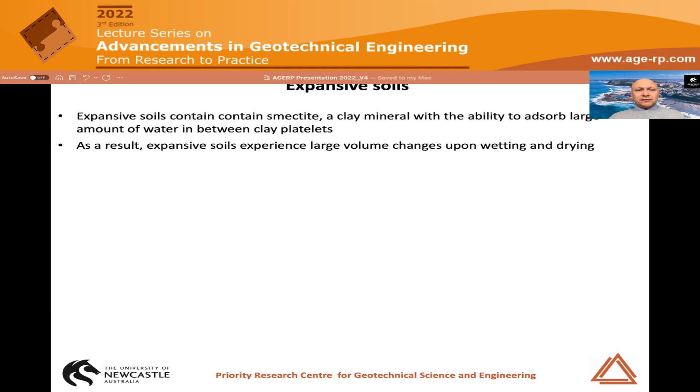So the talk is about expansive soil, and those soils are basically characterized by the fact that they contain smectite, and smectite is known to be a swelling mineral. So it has the ability to adsorb a lot of water in between the clay platelets, and that for two reasons: the platelet surfaces are negatively charged, so they attract the positively charged water dipoles, and there is a weak bonding between the platelets that actually allows the platelets to be pushed apart and take up the moisture, the water. And as a result of this phenomenon, those sorts of soils experience large volume changes if you wet them or dry them.

And as you can imagine, that can pose some problems for structures that are built on expansive soil or using expansive soils. You've got such an example here on this photo - this is a building in Newcastle that has been vacated and cannot be used anymore. It's got very serious structural damage, which is caused by those movements, and in particular differential movements of the expansive soils it's built on.

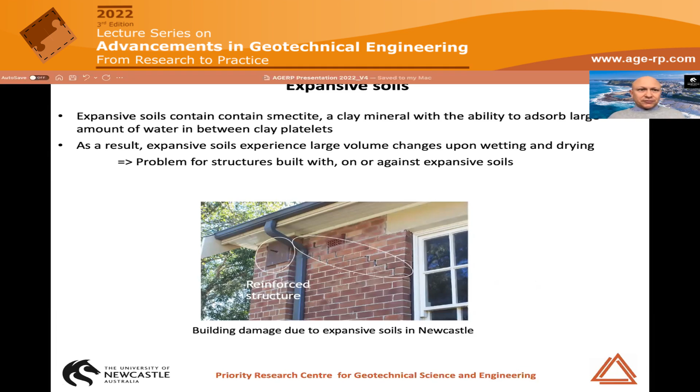Now, one of the issues we're dealing with is that those soils are fairly common in Australia. You've got a map here that was produced in 1983 by Richards, and it shows in black the extent of expansive soil. One of the problems is that those areas actually coincide a fair bit with areas where we have a lot of urban developments, infrastructure developments. So basically that poses a geotechnical problem for engineers.

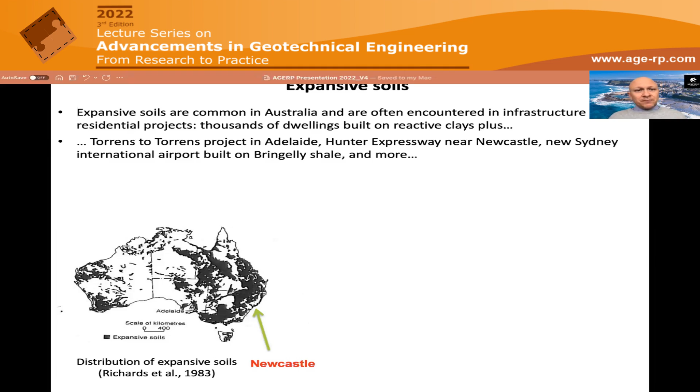So we've got thousands of dwellings built on reactive soils, but not only that, it's not only a matter of simple residential houses. We've got big projects as well involving expansive soil. So you've got, for example, here a photo of the Torrens to Torrens project in Adelaide - a major infrastructure work, and there are some expansive soils involved in here.

You've got now a photo of the cutting of the Hunter Expressway, which is a highway near Newcastle. And that cutting shows you interbedded layers of weathered claystone, expansive, and coal material. And for financial and environmental reasons, those materials were actually incorporated in the earthworks of the freeway, so posing challenges.

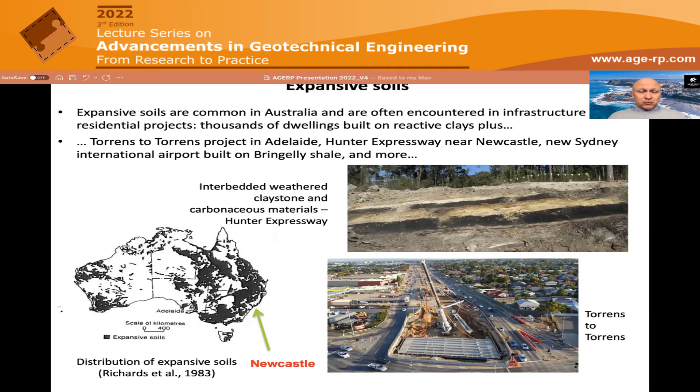One of the latest developments here in New South Wales, the new Sydney International Airport, is built on a profile that has a lot of Bringelly shale, which is known to contain expansive minerals as well. So it's a real engineering problem to deal with those expansive soils.

As such, it's quite important to be able to characterize the volume change upon wetting and drying of those soils. There's volume change upon mechanical action, and there's volume change due to wetting and drying. Here I'll be focusing on the wetting and drying side of it, in particular the shrinkage curve and the swelling response.

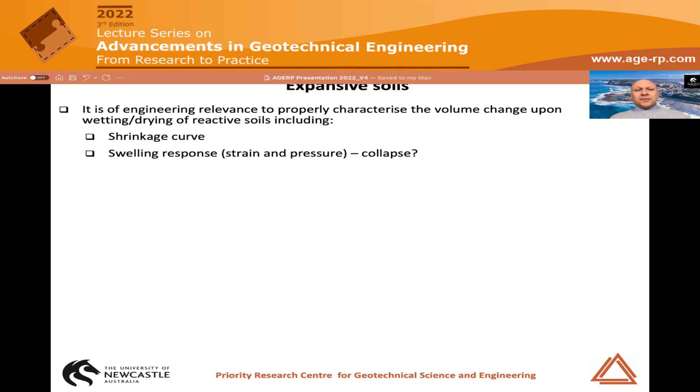And the swelling response is in strain and pressure. And we'll see it may involve some collapse, which I'll define and explain.

Now, just a quick note, you've had talks about desiccation cracking. I just want to say it is out of the scope of this presentation. It is relevant for engineering practice, but out of scope at the time being.

The idea here for me was not to give an extensive lecture on the topic, but just use this as an opportunity to share some of our findings on those matters, and try to actually look at the microstructural aspect of it to explain and interpret some of our results.

The reason for that is because we know from the 50s that there's a very strong influence of soil structure on soil behavior. It's been recognized fairly early for compaction tests, for example. That's one classical example, but you'll find other examples of that.

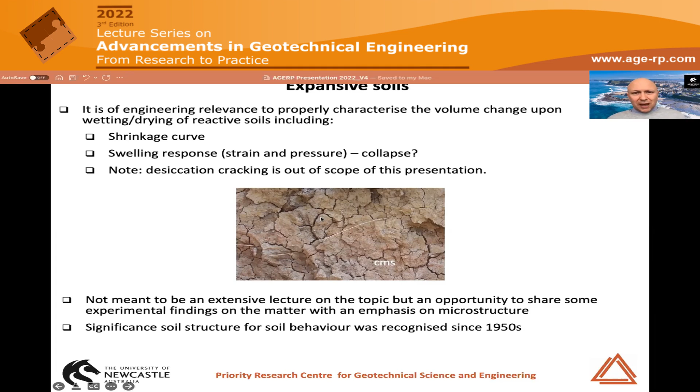Here we talk specifically about microstructure because we're looking at what's happening at a level that we can't see with the naked eye. So we're not talking about those sort of cracks. We're trying to understand what's happening inside the soil at a level that we can't see.

So how do we actually characterize the microstructure? If you go back to the early literature, what you find is that description of microstructure is typically qualitative. You've got those drawings of rectangles showing the platelets or arrangements of assemblies of platelets with edge-to-edge, edge-to-face, face-to-face contacts. Sometimes you've got scanning electron microscope, or SEM for short, images supporting the analysis.

Now these days, you've got a range of quantitative options. If you're interested in characterizing the microstructure in a quantitative manner, you've got nitrogen adsorption, MIP which is mercury intrusion porosimetry, tomography, and others. We've used for all our research the MIP technique, mercury intrusion porosimetry.

It gives you a quantitative analysis, but you've got to be careful. It's not what I call the magic bullet. It relies on assumptions, it's got limitations, so you need to be aware of those when you use such a technique. We typically combine SEM analysis and MIP to get a more comprehensive assessment.

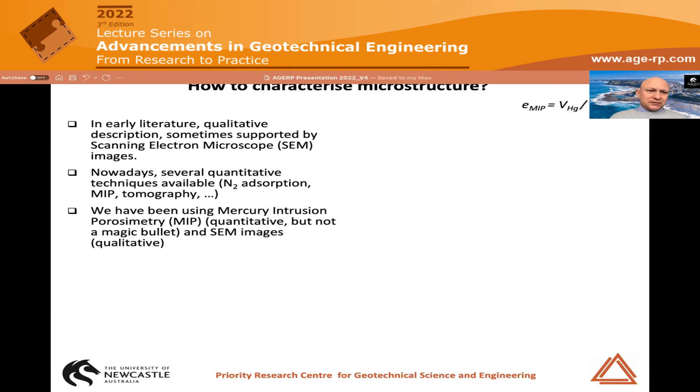What this is defined as is basically we're looking at the volume of mercury that has been intruded in a specimen over the volume of the solids. So the specimen has no water, in the mercury it's only solid particles, so that's the VS. And this is a function of entrance pore diameter.

So that's the thing you want when you characterize microstructure, you want to know about pore size. The intrusion curve starts with a large diameter, easier to intrude, and we push the mercury in and progressively it intrudes the smaller pores.

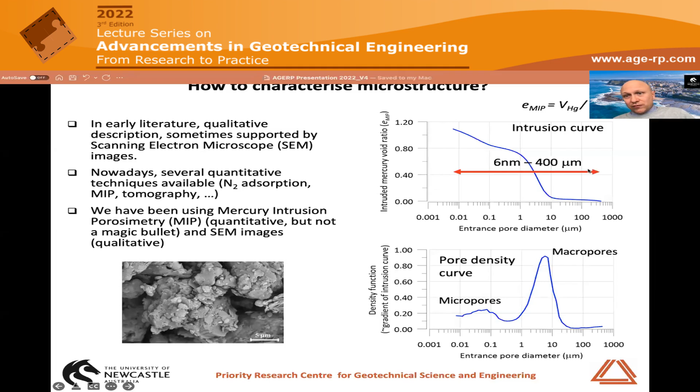So fairly wide range. Now, what happens is that soil structure changes when you load the soil hydromechanically, so external stress or hydric stress, and it's even more pronounced for expansive soil. I wanted to show you the results of Maryland clay, which is our favorite candidate soil here in Newcastle. It contains about 10% of interlayered illite and smectite, and it's got a plasticity index of 46%.

Starting by the figure in the middle, so these are all pore size density functions, showing the peaks of pore families, with pore diameter on the horizontal axis. Starting with the one in the middle, what you see is that we've conducted an MIP analysis post-compaction. As you reduce the void ratio of the specimen, so the more you compact it, the more the macropore family reduces. So the micropores are unaffected, but the macropores reduce in density and in size.

Now, if you take such a compacted soil and you allow it to swell freely without surcharge, the pore size distribution may go from the continuous black line to the blue line. And if you did MIPs along the way, if you stopped the test and did MIPs, which we did, what you see is that you tend to have the two pore families sort of merging. So that big pore family in the middle is partly the result of the merging of the two families of pores, with a reminiscence of micropores on the left.

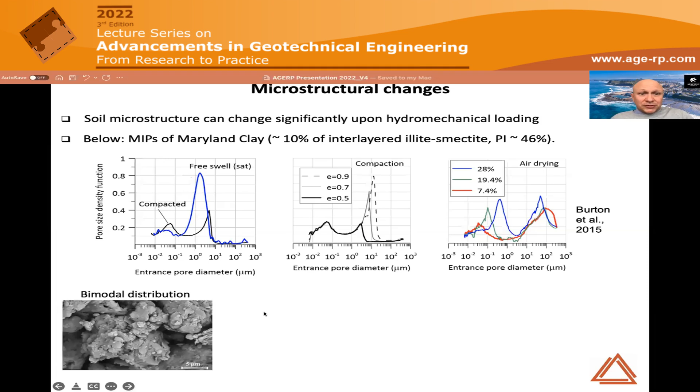And basically, if you take an SEM photo, what you find is you go from a clearly aggregated structure to something like a matrix-like structure, where you can't really see macropores and micropores anymore, which is consistent with this sort of distribution. Now, if you look at air drying, starting from the blue line, you find that this time the drying affects both micropores and macropores significantly. So the micropores tend to reduce, that's your aggregate shrinking, and the macropores can reduce or increase because you may have opening of porosity in the process. It's quite a complex phenomenon, that one.

So if we consider the fact that microstructure affects soil behavior, and if you see that microstructure changes so much during the hydromechanical loading processes, it makes sense to try to follow what's happening with the structure, and in particular try to quantify it. So one thing is to show it and have something qualitative, but the question is, okay, how do we process those curves here to get some quantitative information that we can use?

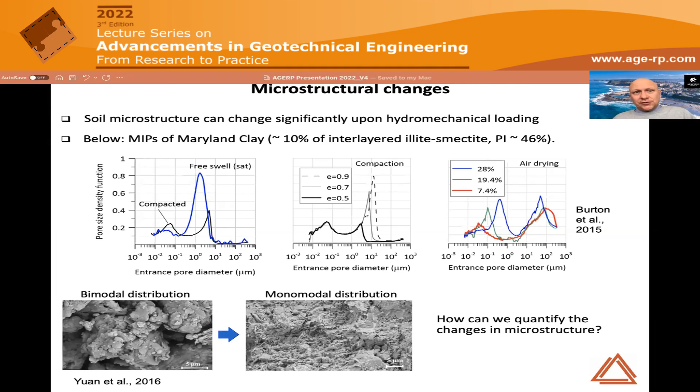And the way we do this is to define a void ratio for the micropores, so that's E lowercase m, and a void ratio for the macropores, E uppercase M. And how do we define those from those curves here, those results? We typically use the intrusion curve here. It's got void ratio on the vertical axis. So we use this to define those two void ratios here.

But what we need is a boundary. We need a boundary that says, okay, all pores larger than that value are macropores, and all the other pores are micropores. So we need to set a boundary here. Once you've set the boundary, you can basically look at how much mercury has been intruded for the larger pores and say, well, all that mercury goes into the macropores, and you can read off the axis the E macro, and the rest is basically E micro. So the rest being the void ratio of your specimen as you've prepared it, or as it stands, minus the void ratio of the macropores.

Now, these whole results here, those values you're going to compute depend heavily on this boundary you select. And there are many criteria in the literature to select a boundary. There's no good or bad criteria - they're different criteria based on physics or logic. And the thing is, you've got to be a bit careful.

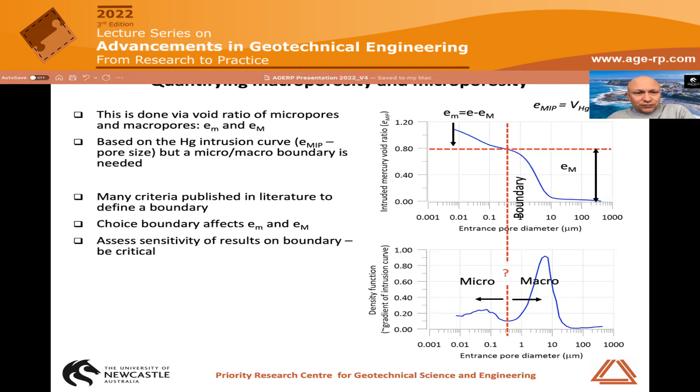You've got to assess the sensitivity of your results to the choice of your boundary here, because it may affect those two values of void ratio a fair bit, so you've got to be a bit critical about it. If you want to know more about this, there's a publication by a PhD student, Yuan et al. 2020. I'll give you a list of publications at the end where we've discussed those different boundaries and what the implications are when you pick one or another.

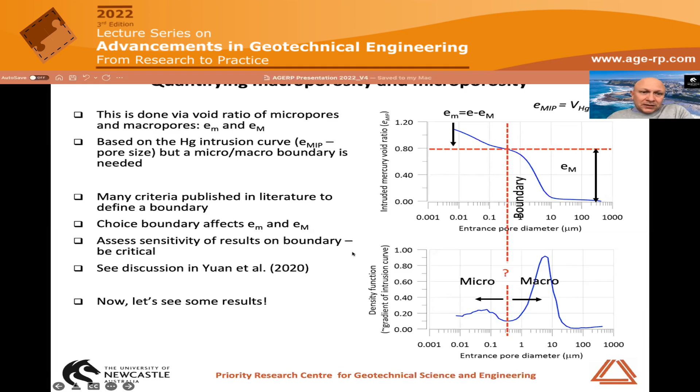All right, so with this presented, let's delve into some of the results here. The first thing I wanted to talk about is the shrinkage curve. The shrinkage curve is the evolution of the void ratio of a soil as it dries, and we correlate the void ratio with the amount of water. That can be in terms of gravimetric moisture content, W, volumetric, theta, or even the water ratio, EW. So you've got here a typical shrinkage curve where the void ratio follows the 1-to-1 line, meaning we've got saturation, and the gradient of the line is the GS of the soil.

You've got an SEM photo of the soil here. That's a remolded specimen, so the SEM is taken at a void ratio of 1. The soil shrinks but doesn't desaturate, follows the 1-to-1 line, and eventually after a while they pass from the line and you get into the residual stage where you've got the shrinkage limit.

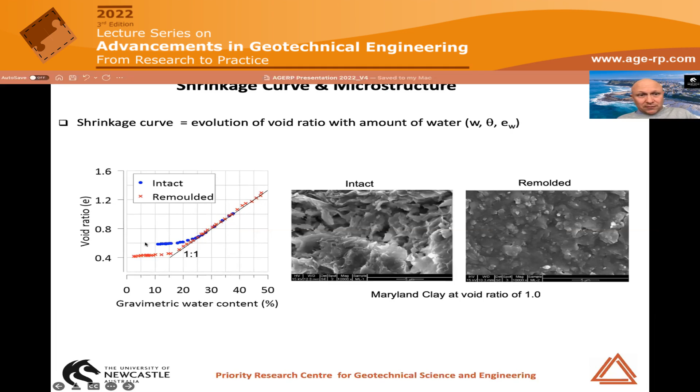So that's well known. Now what's interesting is that if you now test an intact bed of Maryland clay, you've got a different result. Similar sort of trend - the soil first shrinks along the 1-to-1 line, but desaturates much quicker. The value of final void ratio here and the value of shrinkage limit aren't quite the same. And what that shows is that you've got a strong influence here of soil structure. We've got larger pores in the intact soil, which basically means we'll have a quicker desaturation. So the blue dots depart from the 1-to-1 line much quicker, and the volume change is not as pronounced as the one of the remolded soil here.

So this is an effect of structure. And when it comes to geotech engineering projects, depending on what structure the soil will have in your project, you may need to test the soil intact, remolded, or compacted.

So for example, we've got projects where we dig the soil out and recompact it in an embankment. Other projects, say for example, you've got a soldier pile wall where you install the piles in an existing profile of soil and you don't dig or backfill, the soil at the back of the wall will be in its intact or close to intact condition.

So you need to be mindful here when we try to characterize the volume change, to try to do that on a soil that has got a structure as close as possible to what we're going to have for a project.

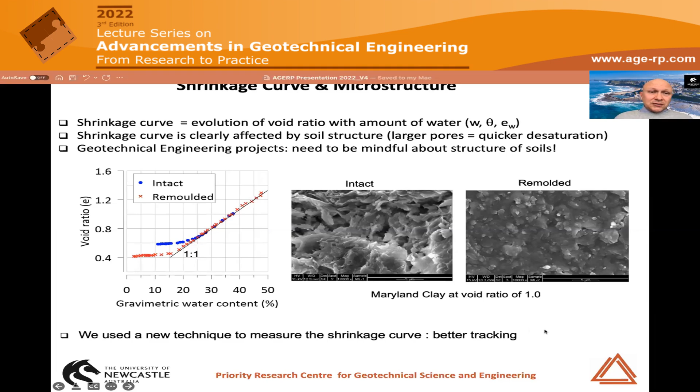Now, I don't know how many of you have tried to or have measured shrinkage curves on a regular basis, but here we've managed to get a lot of points and a very nice tracking of the volume change. We did that using a technique that we've developed because we got a bit frustrated with some of the techniques that were typically used. I'd like to present that to you because it may be quite useful.

In particular, the typical way to do it, or probably the most logical way, would be to have a specimen of known shape, clearly defined shape, typically a disc, and you measure the dimensions of the specimen. As it dries, you keep measuring the dimensions, you know the volume, you know the mass, you can plot the shrinkage curve. The issue comes where you've got irregular shapes, or if you've got warping or distortion upon drying.

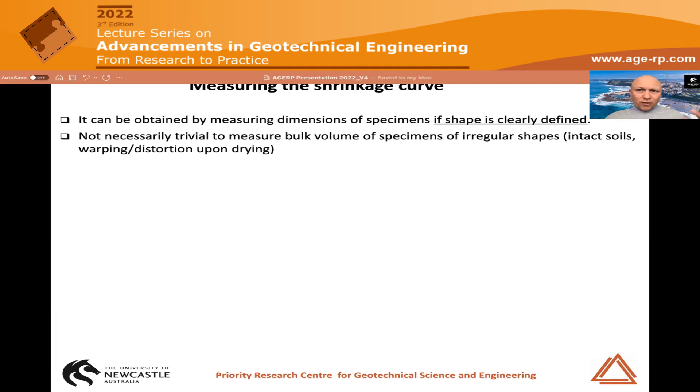The one that is really good because it's non-wetting is mercury. But the issue with mercury is safety - plenty of safety issues around mercury, so it's quite difficult to work with mercury in an open container these days.

Water is a fluid, but it's adsorbed by the specimen, so it doesn't quite work. You can use oil, but oil isn't absorbed by the clay, though it contaminates your specimen. So if you've got cracks or big pores, it gets into there, and you end up having inaccurate readings.

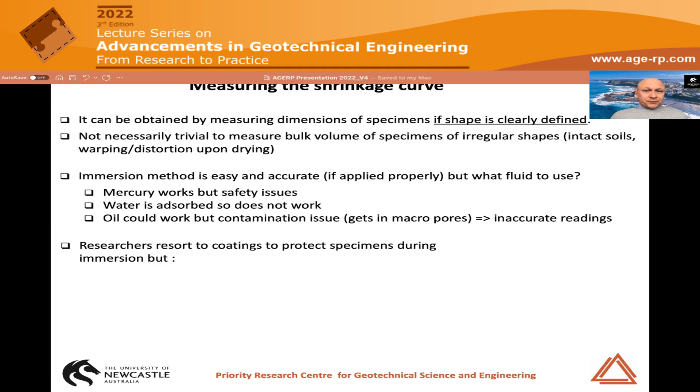So what people did or suggest is to basically coat the specimen. One known technique is to use paraffin. You've got a photo here, which I found from the web, of a paraffin-coated specimen. The issue with this is that if you want to do a whole shrinkage curve, you need plenty of specimens in parallel, or you have to coat, remove the coating, new coating, remove the coating, and so on, with all the accumulated error that you get on your measurement.

There's also another technique called the plastic bag technique, where you put a specimen in a plastic bag, vacuum it, and then immerse the plastic bag in the liquid. That has got other issues as well. I mean, vacuum is a stress - you're putting some stress on the specimen. You've got the vacuum bag, which is linked to a tube as you immerse it. And there's a lot of handling and smearing of specimen.

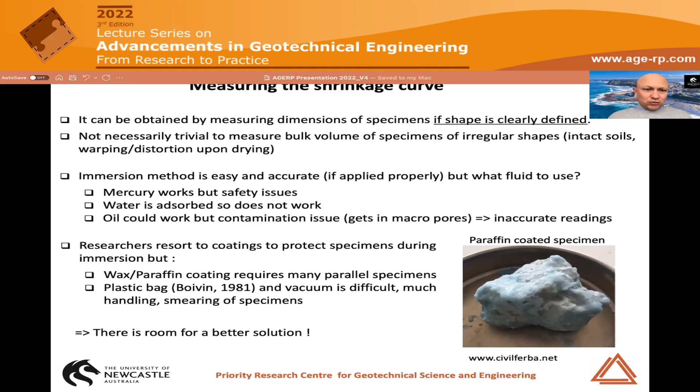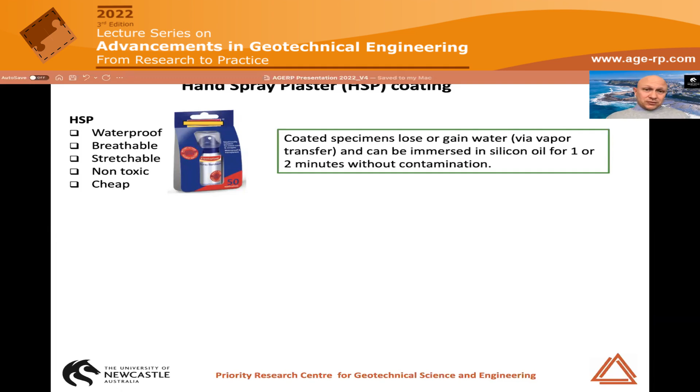What that does is that if you coat the specimen with this, you can have moisture exchange, gaining or losing water by vapor transfer, but you can then take the specimen, immerse it in oil or water for a short period, and the spray plaster will act as a barrier, so your specimen doesn't get contaminated.

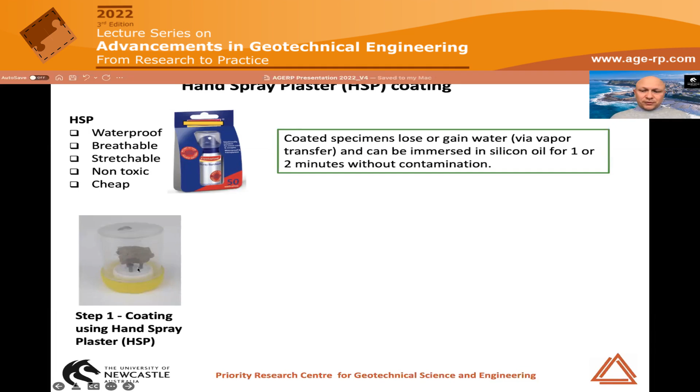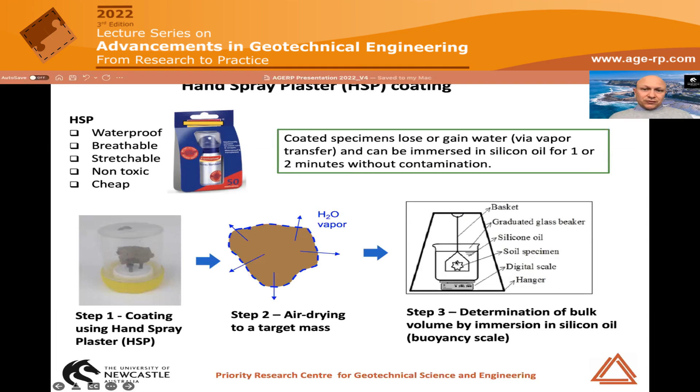So what you do is take the specimen, put it on three prongs here, spray the top part of it, cover it so that it doesn't dry too much. After a while, turn the specimen upside down, repeat the operation so it's entirely sprayed. Then you can expose it to drying if you're after the shrinkage curve, or humidity in a fog room if you want a swelling curve. And then basically use the buoyancy technique, immersion, to get the volume of that specimen. That works for any irregular shape.

And the benefit of this is that it's also fairly useful if you want to measure retention curves. If you want a retention curve expressed in saturation degree, you need volume - a relationship between volume and moisture content, or volume and saturation and suction. That technique allows you to get really nice tracking and accurate data here.

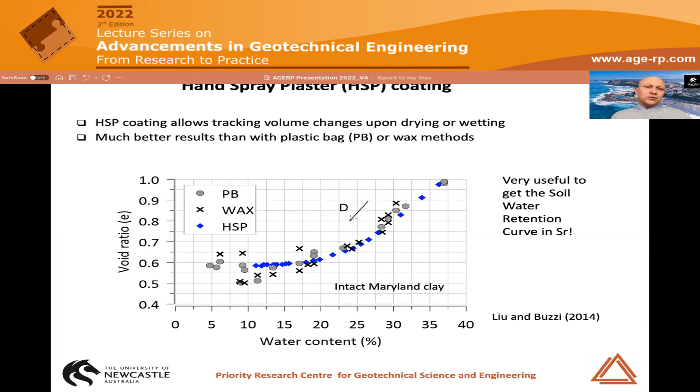So it's pretty useful. Now, let's move on to the swelling response here. And just as a preamble, I want to say that all I'm going to present here is only in 1D. Now, 3D swelling in all directions is relevant for engineering practice, but it's more complicated. So I thought, let's start with 1D information and see how we can move from there.

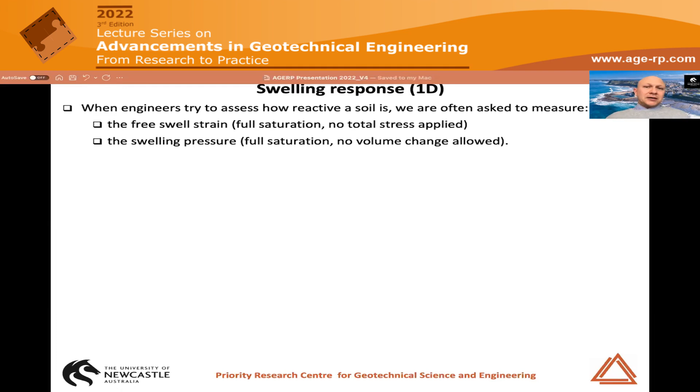Our experience here in Newcastle is that when we have to deal with reactive soils, there's a range of parameters that engineers like to measure: Atterberg limits, linear shrinkage, and so on. And when it comes to the swelling response as such, they're often interested only in the free swell strain. That's taking the specimen in an oedometer test, letting it swell in 1D under full saturation without total stress applied to the specimen - so the maximum swelling strain you're going to get. And the swelling pressure - again, full saturation, swelling to full saturation, no volume change allowed, and get those two numbers. From that, you assess how reactive the material is.

So you can actually, on a stress strain plane, plot those two results. You've got here swelling pressure on the left axis - that's the maximum stress when you've got zero strain allowed. And the free swell strain is here at the maximum strain under no stress applied.

So before we keep going, I'd just like to clarify the conventions here for my presentation. I will be talking about strain rather than void ratio.

It's a bit against geomechanics conventions, simply because when you compare the amount of swelling for two soils at different void ratios, the void ratio can be tricky to interpret. Whereas if you look in terms of strain, you get a clear idea of the magnitude of swelling you're observing. I'll consider positive strains or positive displacement as corresponding to swelling, since the focus is on swelling, otherwise I'd have this negative sign all along.

The stress on the y-axis here is a total stress, because the way we measure swelling pressure is with a load cell external to the specimen, so technically we measure total stress. And when you put a load on a specimen, it's a total stress you apply to it. So at this stage, consider stress here as total stress - it can be either the swelling pressure measured or a total stress applied to a specimen.

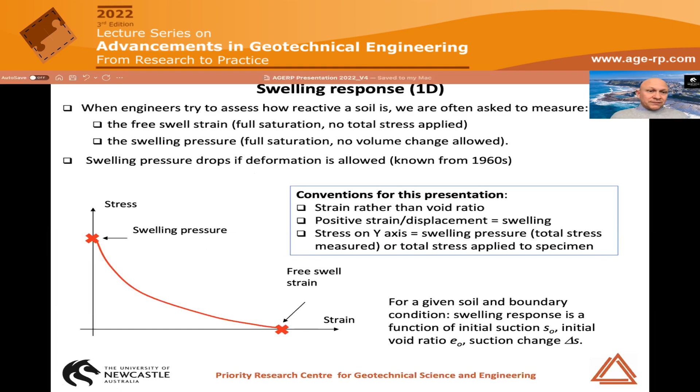What we know as well is that for a given soil and boundary condition, the swelling response is a function of the initial suction, the initial void ratio, and the suction change - in other words, the magnitude of hydration. So in fact you don't have one curve, you've got many curves, and that curve shifts upward as the amount of hydration goes up, the initial suction goes up, or the initial void ratio goes down. So the denser and drier your specimen, the more swelling you're going to get.

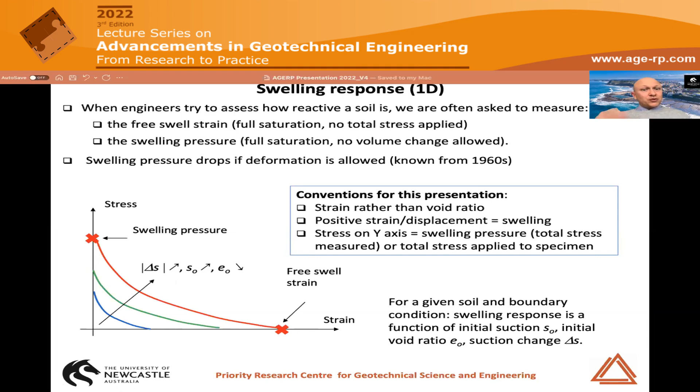Now, how is this relevant? Well, in the lab we tend to often test to full saturation because that's quite practical. But in the field, you've got to ask yourself, to what extent will a soil undergo full saturation? Or do we have partial swelling, partial hydration of the soil under a given environmental condition? So again, full saturation swelling would possibly be the worst case scenario, but is it the most common case? Maybe not.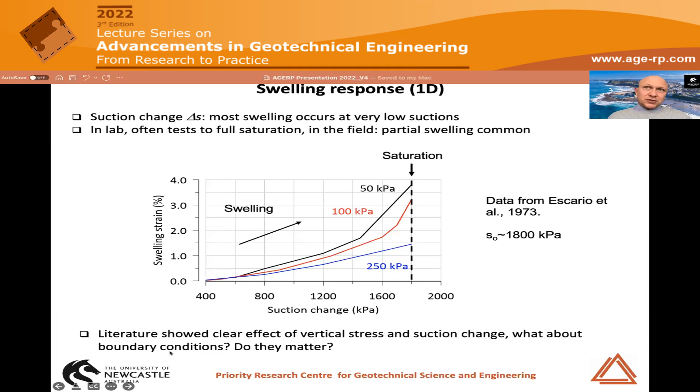So from the literature, we know clearly the effect of vertical stress on swelling, or confinement, and we know the effect of suction change. One thing we don't quite know is the effect of the boundary conditions. We've been talking about free swell and constant volume, so we know what these two do - but what happens in between? Does it matter?

So what we looked at is establishing this swelling response in the first place - how the combination of swelling strain and swelling pressure evolve as you allow for more and more swelling strain. We did that on compacted Maryland clay using a constant volume test that gives you the swelling pressure in point B, a free swell test that gives you the free swell in point A, and a range of swells under constant stiffness - those are basically soil swelling under a spring, so you've got a linear relationship between stress and strain.

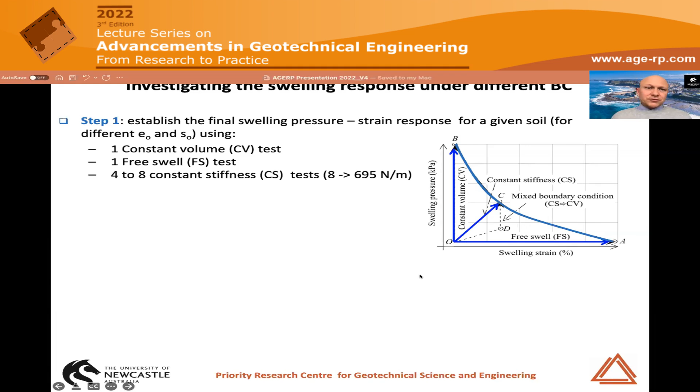Those tests are shown here by the blue arrows. And then what we did is conduct other tests using different stress-volume paths, and see where the final stress and strain falls - whether it's close to this swelling line or not.

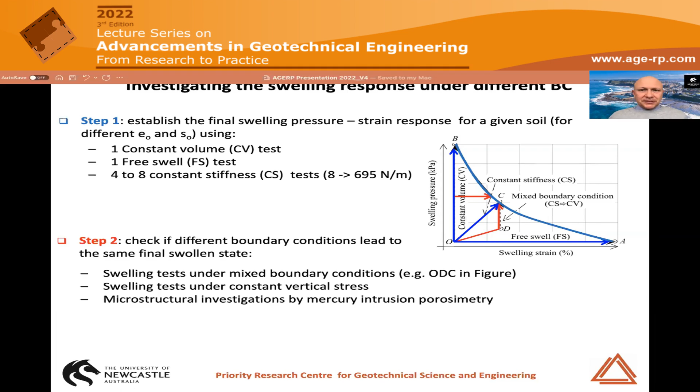So to do that, we did a series of tests under constant vertical stress, that's the horizontal red arrow, and what we call mixed boundary conditions. So swelling at a certain stiffness, then block the volume, and let the swelling pressure develop. See what happens. And at the end of all those tests, we conduct some microstructural measurements using the MIP technique and see what happens inside the specimen.

The first series of tests we did was with the Hunter Expressway claystone, the one I showed you a photo of earlier, and it contains 27% montmorillonite, which is a sort of smectite. We consider 2 initial water contents and 2 initial void ratios, so that's 4 combinations of starting conditions.

In stress versus strain planes, you've got the different responses established using the specific tests. What you see is, first, the denser the specimen, the more swelling we get. That's how the empty diamonds sit above the full circles for both cases. So that's consistent with what we know, and that's good.

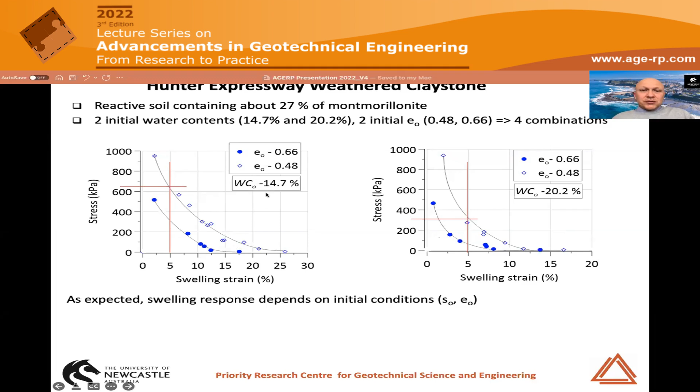Now, if you look at the effect of moisture content, you'll find that for a given void ratio, say 0.48, the wetter the specimen, the less swelling you get. For example, if you look at a swelling strain of 5%, you'll find more swelling pressure developing in the drier specimen. So that's reassuring, first of all, that you establish those curves and they follow basically what you would expect.

Now, the question is, what do we get if you superimpose the results of the mixed boundary conditions and other tests? Well, that's what you've got in black here. And what you see is that regardless of the path, you basically end up fairly close to all the other points, or in between where you would expect that line. So at the macroscopic scale, we end up with an expression of swelling in terms of strain and stress or swelling pressure, fairly similar to what you'd find along the line, the swelling response established with the prior test.

Now, what happens in terms of microstructure? If we take those 2 black dots, the diamond and the inverted triangle, and compare the microstructure, these are the black lines here, the continuous black and the dashed black. Just to give you an idea of the variability of structure, the purple line is as-compacted, the green line is free swell, and the dashed line is swelling under constant volume. So you see there's a fair bit of change in microstructure between the two.

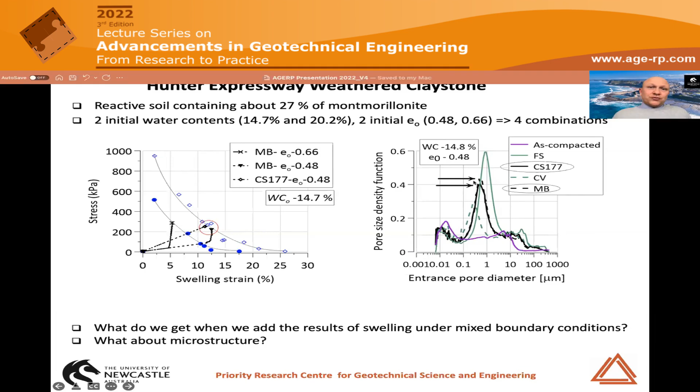What we found is the microstructure of those 2 materials, having swelled along different paths, are fairly similar. So that corroborates the observation at the macro scale.

Now, we did a series on Maryland clay as well, and these are only partial results — there are more results in a paper we published last year. Again, we basically observed the same thing. We've got a swelling response established with a blue cross, then a series of other tests, constant vertical stress, the red lines, and mixed boundary conditions. You find again that the tests, regardless of the path, basically end up very close to the swelling line.

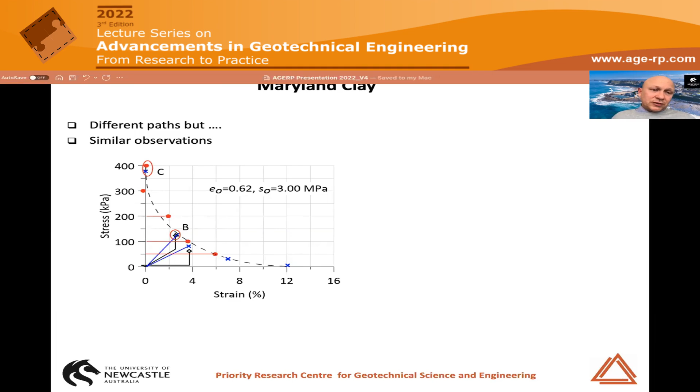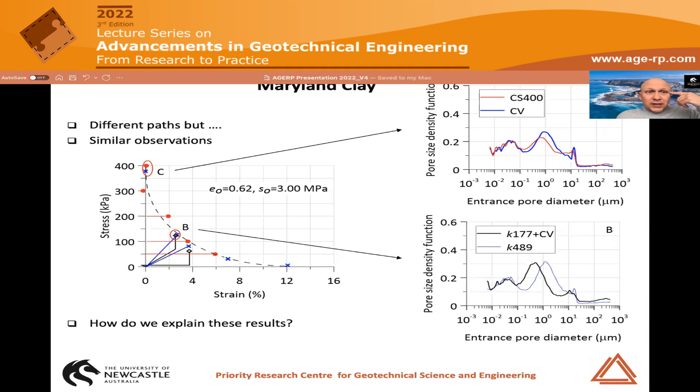Now, why is that? How do we explain this? To explain that, we had to go back to some microstructural analysis, and what I'm giving you here is our interpretation of this. If somebody has a different idea, I'd be glad to hear it. But what we did here was conduct another series of tests, swelling under constant vertical stress with increasing value of stress, and at the end of it, again, microstructural measurements.

Our interpretation of that, in the context of the previous test, is that basically what matters when it comes to the swelling response and the path followed to get to full swelling is the magnitude of the maximum applied stress, rather than the path itself. So as long as you end up with the same maximum stress, the strain and microstructure you get will be similar.

If there's more swelling and then coming back, so if you overtake the swelling line and come back, it might be a different story, as some of the test results on swelling pressure in the literature tend to suggest.

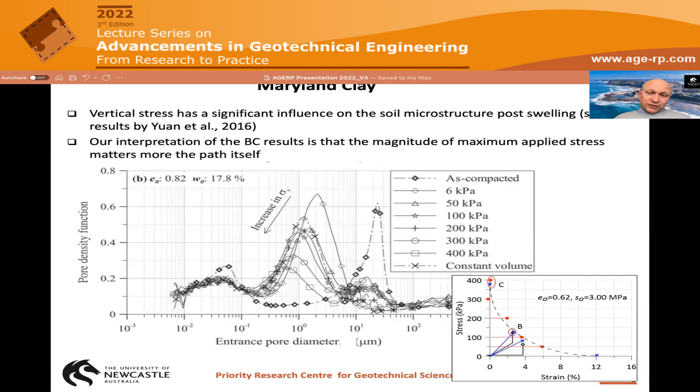So the soil will be compressed, and we'll have compression instead of swelling here. And that leads me to the concept of wetting-induced collapse. That's something that's been known since the 60s - it's a reduction of soil volume or swelling pressure upon wetting under load. So you take an unsaturated specimen, put a load onto it, wet it, and you get either swelling, an increase in swelling pressure, and then reduction.

That's when you do a test at constant volume. Or if you do a test at constant stress, like the blue line, where you've got the displacement measured on the right axis, going down as specimen height reduces. What you've got here, at point A - this is all 1D, an oedometer - you apply the load, so the specimen is compressed to B.

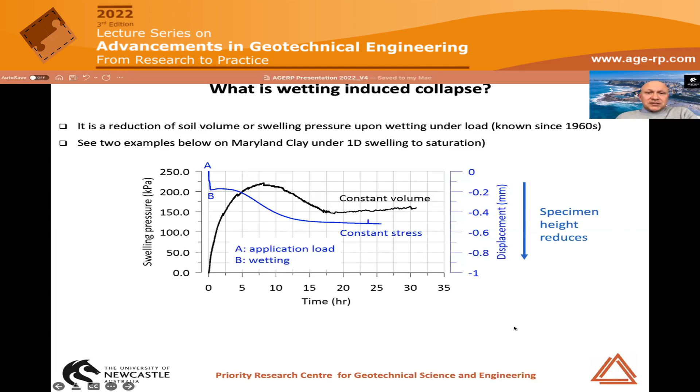Then at B you wet the specimen, and you have initially some swelling, and then basically you get a collapse - specimen height reduces. Now this is how we express collapse here.

Now how is this relevant to practice? Well, you've got some soils that are naturally collapsible, and loess is one. There's plenty of loess in China, and you've got a photo here of areas where the soil has collapsed. You can imagine if you're building on a soil profile like this, it may be challenging.

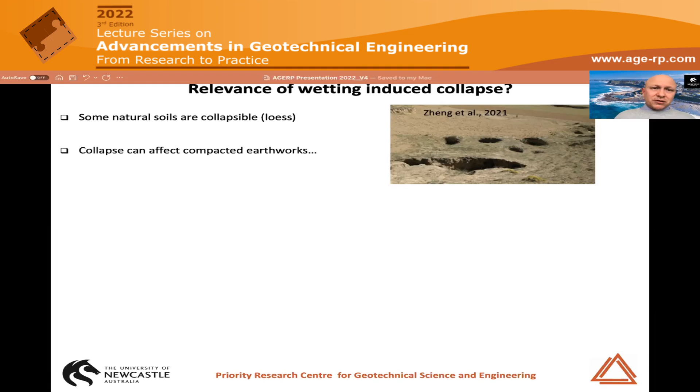It also affects earthworks. There tends to be a belief that if you've got compacted earthworks, collapse is not a problem. It's not a problem if it's done well, but it's not always the case. You've got here a photo, for example, of a bridge abutment where the embankment has collapsed after heavy rainfalls, and that brown mark basically shows the magnitude of collapse of that soil, so fairly significant.

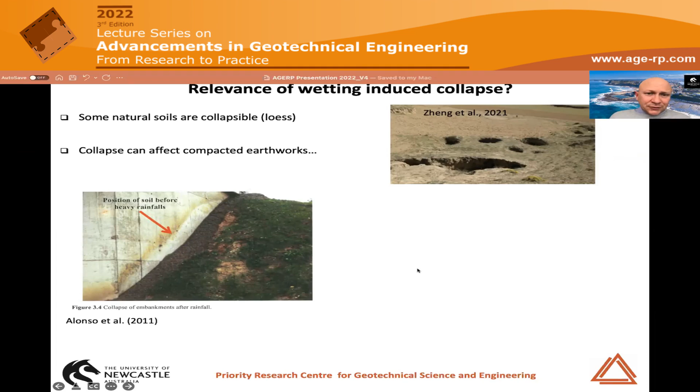In Australia we've got a different challenge with collapse. What you see here is a waste rock dump coming from open pit mining - it's a consequence of mining that we create these mountains of dirt. And those are placed without much compaction; it's basically compacted by self-weight. There's not a lot of compaction activity happening when this material is placed here, and these are hills of hundreds of meters in height.

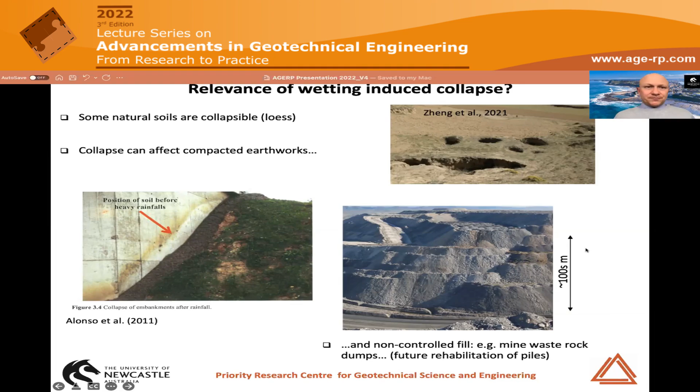And at the end of the mining operation, when the mine reaches its end of life, this is all capped and turned into vegetated ground. Now what happens is, because there are kilometer squares and kilometer squares of it, the question arises as to what extent this ground is suitable for development. You can imagine if you've got something that hasn't been quite compacted, and it's not saturated, and we wet it, and there's a lot of load on it because it's really high, there could be a lot of collapse happening. So that's an area in the mining geotechnique space where collapse is very relevant.

Now, how do we actually capture collapse, or explain collapse? There are different models to do that.

I'll present some results using the typical two-stress approach, with suction and net stress. For the test we conducted in the lab, we start with a loose packing of clay particles at a certain moisture content, at point A. Then we compact them to a certain level, point B, offload them, and bring them back to a certain stress, point C, to do a test.

At point C we wet the specimen, a swelling test under constant vertical stress. In the suction net stress plane, you've got what we call the LC curve, the loading collapse curve, which is the yield point that tells us if we're going to have collapse or not. If the stress path crosses that line, you've got collapse according to the model.

The way to look at those curves is that for a given void ratio, the LC curve is the locus of compaction stress and suction points. So at a certain point, it tells us how much stress was needed to get to that void ratio, or the maximum stress applied, and what is the corresponding suction.

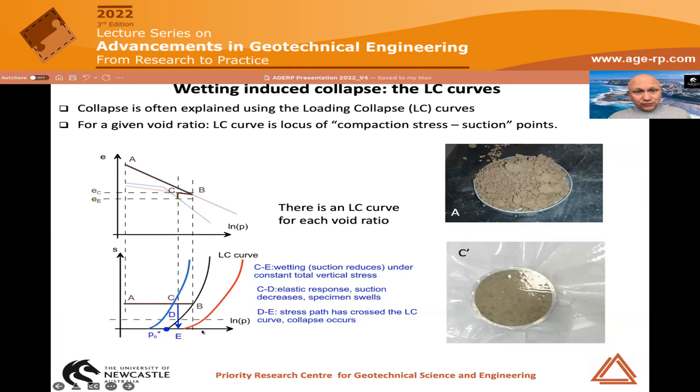Before moving on to more results, I wanted to explain how we can measure the LC curve from compaction. If you do a series of quasi-static compactions, not the dynamic ones, to a target void ratio, you can measure the total stress you apply to the soil and the suction. If you've got the combination of void ratio, total stress, and suction, you can plot the LC curve. You repeat that for a range of suction values to build the whole curve.

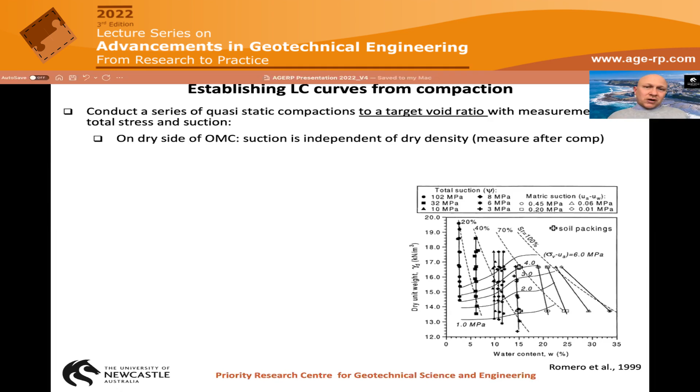So how does that matter for our problem? If you're on the dry side of the optimum, suction can be measured before or after compaction, no problem, since it's independent of dry density. But if you're close to optimum or on the wet side, you need to measure suction during compaction, for example using a tensiometer.

For Maryland clay, here's the evolution of measured matric suction with vertical stress during compaction. The optimum moisture content is 24%. At 13%, on the dry side, there's no change. As you approach the optimum, you start to see some influence, related to the concept of mechanical wetting. If you exceed the optimum, you get a very large change of suction during compaction. So when associating a value of suction with a value of stress to build the LC curve, you need to be mindful of this and make sure you measure suction correctly.

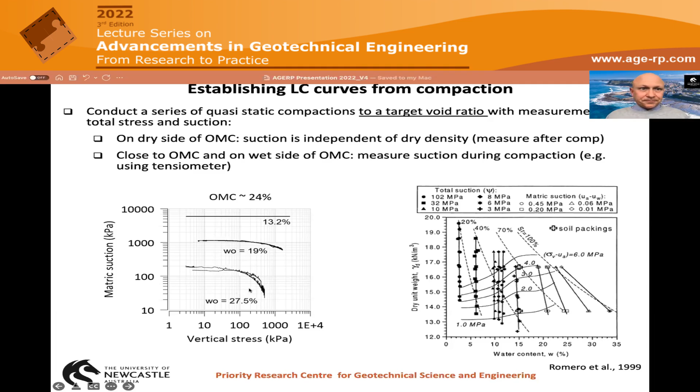With that explained, let's go to our experiments. We established the LC curve for different void ratios, and we decided to conduct a series of swelling tests under constant vertical stress inside the elastic zone—meaning away from the LC curve.

This is a plane where you've got log of suction on the vertical axis, log of net stress on the horizontal axis. The red dots are the measured LC curve with the different points where we conducted those quasi-static compactions. We had planned to start with the dry specimen and wet it under different stresses, so something fairly common.

But what was surprising is that when we did those tests, we observed collapse in areas where we weren't supposed to see it. Take C double dash, which is quite far from the LC curve on a log scale. What we've got is collapse - the specimen reduces height as we wet it. We were quite surprised by that, and we had it in other places too. We thought, okay, what's going on here? In the end, we had swelling at B, but collapse at C and D.

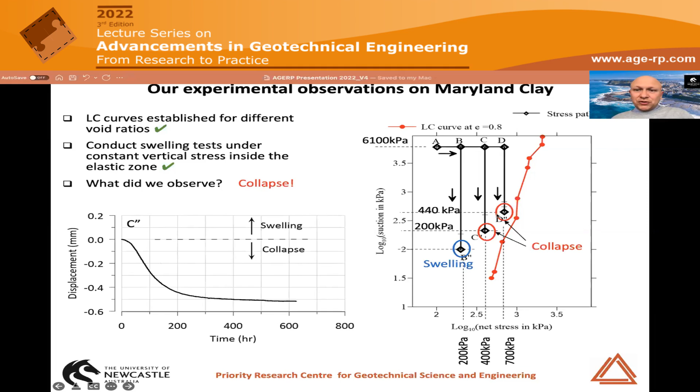So first thing we did is we questioned the quality of our data. We repeated the test and we got the same conclusions.

Then we thought, okay, is it because we start with a void ratio of 0.8 before swelling? We have an LC curve at 0.8, but as the specimen swells, the void ratio increases. We know the LC curve is defined for a certain void ratio - if you've got a higher void ratio, the LC curve is on the left. That's shown theoretically with the blue line. We tried that, but that wasn't the explanation, because the degree of swelling didn't really change the void ratio that much, and the LC curve was nowhere near where we needed to be.

So we thought, could it be the microstructure then? Collapse occurs in the macropores - you need an open porosity to observe collapse. You can refer to the recent review by Li et al. about this. We know reactive soils undergo significant microstructural changes during loading. And we know that LC curves are established, as we did it, and as many people do, without really considering microstructure. It's all about the values of total stress and suction during the test. So is there something here?

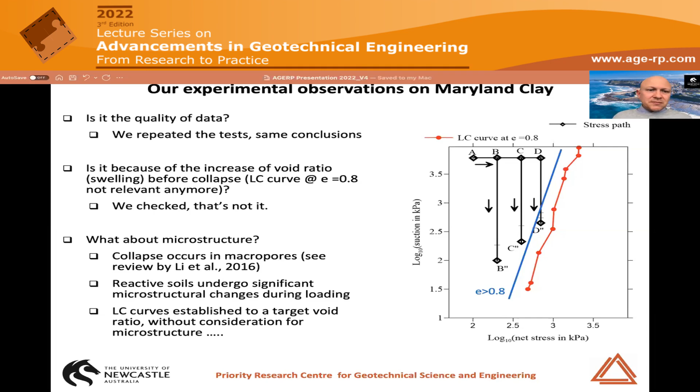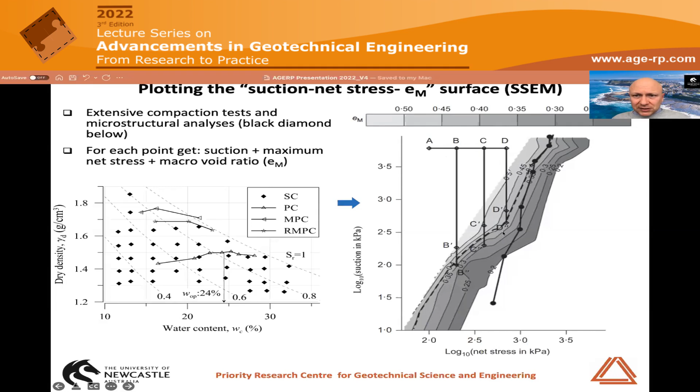To investigate, we did a series of compaction tests - that's all the black diamonds on this Proctor plane, plenty of them. We did some microstructural analysis. For every point, we measured suction, maximum net stress, and the macro void ratio. We wanted to establish a contour of macro void ratio - that's the surface I call SSEM, for stress, suction, and macro void ratio. We tried to interpret our results in the light of this macro void ratio information.

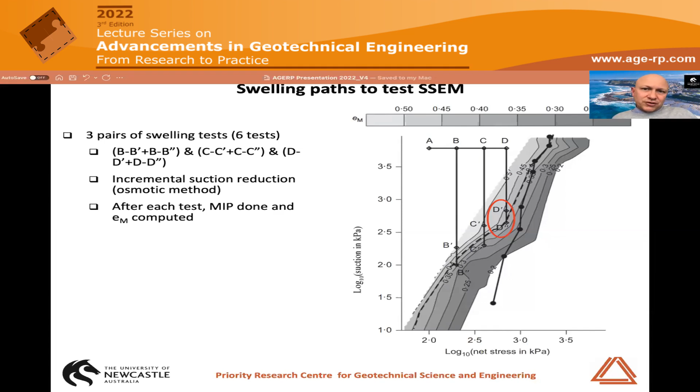After establishing those contours, we conducted 3 pairs of swelling tests - 6 tests total: B to B prime, B to B dash with one test at the end giving microstructural information, and B double dash giving microstructural information again. We repeated that for C and D. We conducted the tests by reducing suction incrementally using the osmotic method, and after each test we got the MIP done and computed the macro void ratio to interpret the results.

The question is: do we cross this surface as we have collapse? Remember, in D dash we have no collapse, but in D double dash we've got collapse. To see whether we cross the surface - since this is a 3D thing - you need to look at a cross section. If you take a cross section along D dash, D double dash, and look at the evolution of macro void ratio versus suction, that's what you get.

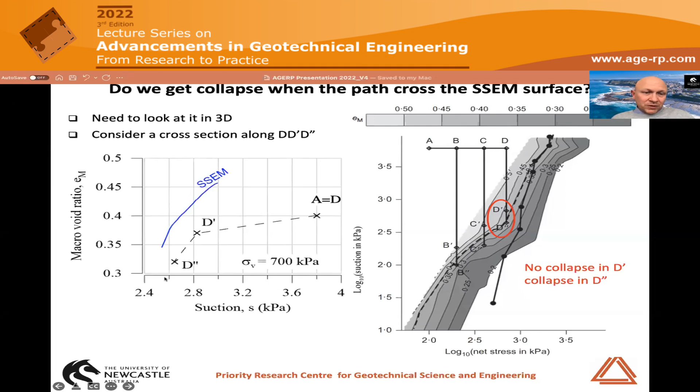That's shown in blue - basically the contour plot of the macro void ratio, and the crosses are the macro void ratio at points D, D dash, D double dash. What you see is, well, we didn't really cross that surface. It didn't really work. But then we thought, hang on - in D double dash, this is a macro void ratio post collapse. The specimen has already collapsed here.

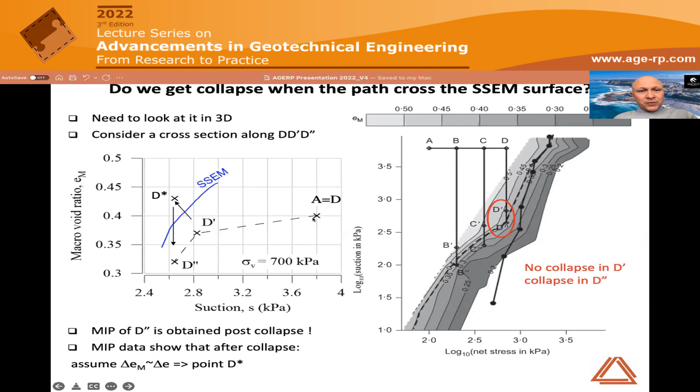So if we look at the magnitude of collapse, and we assume that basically most of the collapse occurs in the macropores, in other words, delta EM, the change in macro void ratio upon collapse, is the change in void ratio, you can plot a point D star here on the other side of the line. That would be the maximum amount of void ratio occurring in the macropores. But somehow it suggests that maybe we have crossed that line.

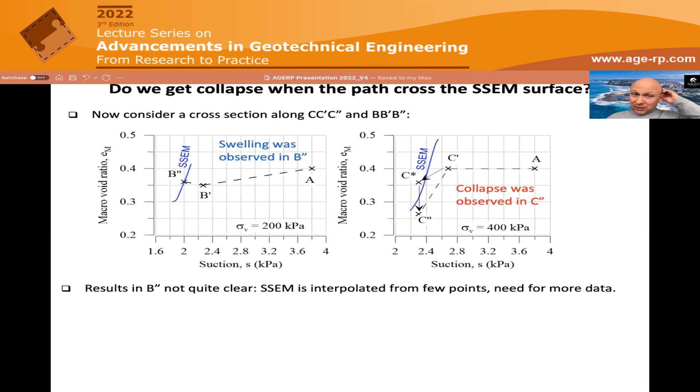Now, if you look at C, we've got the same observation. And if you look at B, not quite. We've observed swelling. That point here is right on the surface. Have we crossed? Haven't we crossed? Not too sure. There's a lot of uncertainty about those values because it depends on the boundary. The surface was established with interpolation between points, so it probably needs more data here to ascertain the phenomenon, but that's a lot closer than the loading collapse curve we had defined before, which is the conventional way to do it.

So what those results suggest is that either we need to look at the loading collapse curve in terms of macroporosity rather than void ratio. The issue with that is you need to do 1,000 MIPs, and that's very costly and time consuming, so probably not a good way to do it.

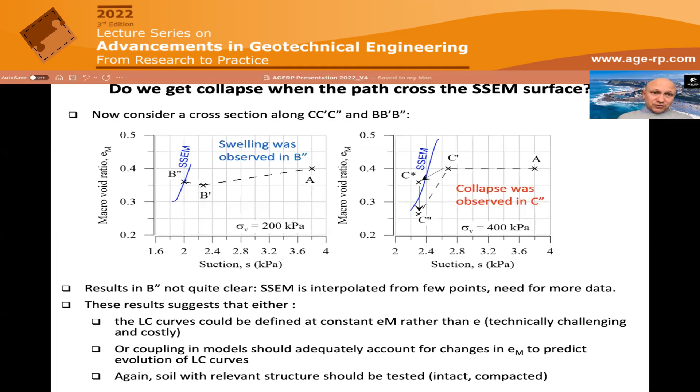Or when we've got models for expansive soil, and there's not a lot of them out there. There are some. The coupling process here between the loading collapse curve and the stress path during swelling probably needs to explicitly account for this macro void ratio here to predict where the loading collapse curve should be. And in any case, it shows that we need to actually test soils with a structure that is relevant to the engineering problem we have to deal with, because macroporosity or macrostructure matters here again for collapse.

So that concludes my presentation, and I'd like to present a few dot points here to summarize. There's a lot of reactive soils in Australia, which pose a lot of problems, and there's a lot of reactive soils around the world as well.

There doesn't seem to be a lot of consensus on how we should treat them from a geotechnical practice perspective. Even in research, there's a lot of interpretation. So there's a lot of work to be done here and a lot of relevance for practice.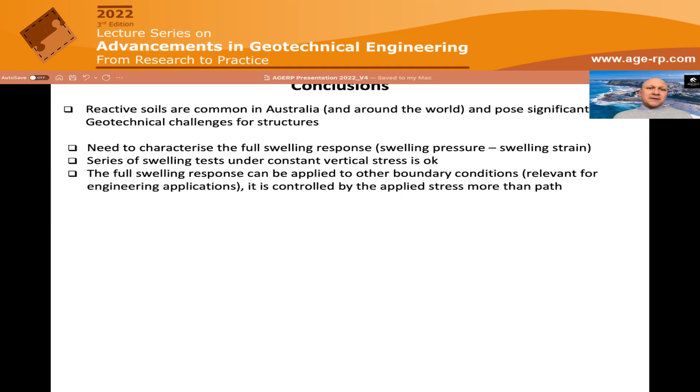Now, one thing we saw, or we suggested, is that you need to characterize the full swelling response, and that's the evolution of swelling pressure with swelling strain. You can do that simply by a series of constant swelling tests under constant vertical stress. That's because we found that it's the magnitude of final applied stress that matters to define the strain you're going to get. And as such, the full swelling response can be applied to a range of other boundary conditions.

Always keeping in mind the fact that we do this to bring knowledge for engineering practice. What are the boundary conditions in practice? It could be 1D, 3D, but also it's unlikely to be a constant volume condition or free swell condition. So being able to characterize the swelling in terms of strain and pressure for different boundary conditions is quite relevant.

Now, what we found is that soil structure matters. To some extent, it's not new. We knew from the beginning that soil structure matters, but sometimes it's only qualitative. Now we've seen it fairly quantitatively, to what extent it does matter. It was quite clear on the shrinkage curve, and it's going to affect other aspects of soil behavior as well.

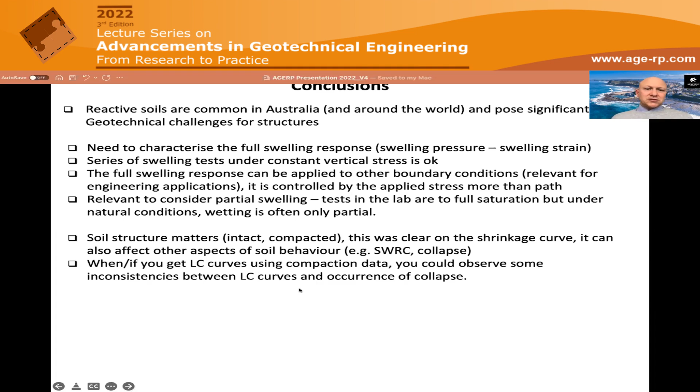There's the retention curve, which you would have heard about in this workshop, and collapse as well, we've seen. So if you're out there doing some swelling tests and wondering about the loading collapse curve or establishing them from compaction data, keep in mind that the microstructure here could play a role, because it could explain some of the inconsistencies you've got between your loading collapse curve and the actual occurrence of collapse.

It is possible there. So if you can, it is helpful to conduct microstructural investigation to try to interpret your results. We like MIPs because we've got one, or we have got one because we like it. It's convenient, but it's not perfect, so you've got to be aware of its limitations. And if you can't get microstructural information, at least try to test soils with a structure that is close enough to your engineering application, or try to minimize sample disturbance if you can.

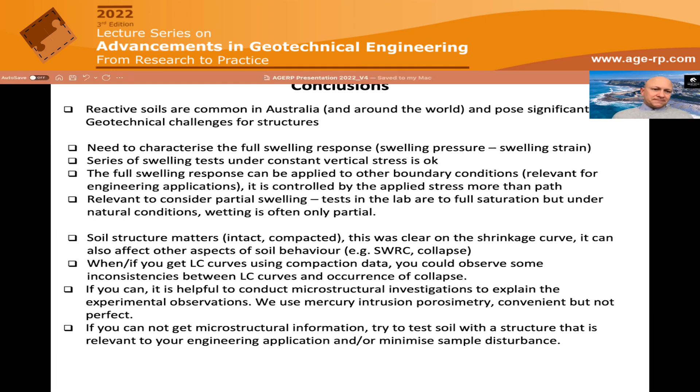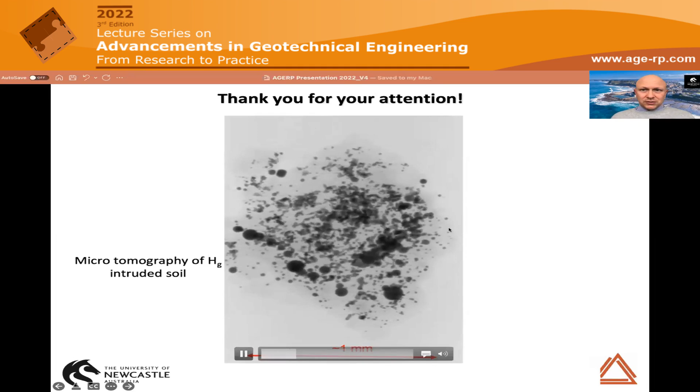And with this, I'd like to thank you for your attention and leave you here with a video of a mercury intruded specimen of soil, having gone through microtomography, to show how the mercury has intruded the pores. Thank you for your attention.

Well, so you can conduct a PSD at any point in time, regardless of whatever hydromechanical loading you apply to the soil. You can stop and measure. The issue is that you have to remove the loading. You can't conduct mercury intrusion porosimetry on the loaded specimen.

We've tried to freeze a specimen being loaded. You have to deal with very, very small specimens to do that. So going back one step, to conduct an MIP analysis you need to freeze dry your specimen, because the mercury enters the pores, and if the pores are filled with water, the mercury won't enter. So one thing you got to do is remove all the water. And if you remove the water by drying the specimen, you change the structure, so you got to freeze dry it.

Now, the question is to what extent - that's one of the limitations - you got to remove the loading from the specimen to be able to treat it. And then the question is, does the process of freeze drying change the structure as well? Now, if you accept that freeze drying doesn't modify the structure to a large extent, which some papers tend to suggest, and if you accept that you have to remove the loading, to look at wetting and drying you basically need to take your specimen from a wet state, dry it, and MIP it, or take it dry, wet it, and MIP it.

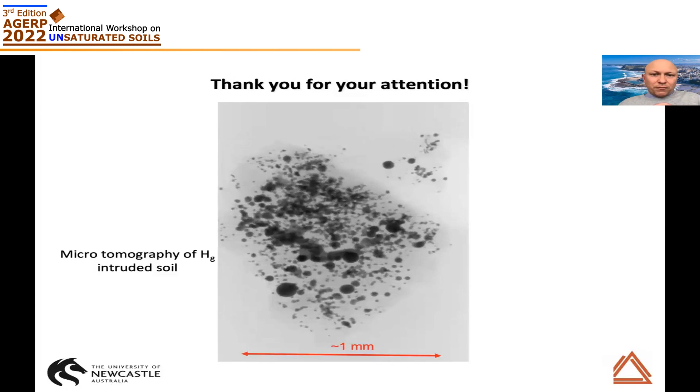But then you've got the issue of basically measuring mercury after having performed the test. And if you look at the photo here, you see a lot of beads. Those beads are basically - when the mercury has been removed, it falls back and forms a bead in a pore. So that's probably in a pore bigger than the bead, and it won't give us exactly the shape of the pore. So it's quite difficult to combine different techniques, or we haven't found a solution. Maybe there is one, maybe somebody has done it, but we couldn't quite do it.